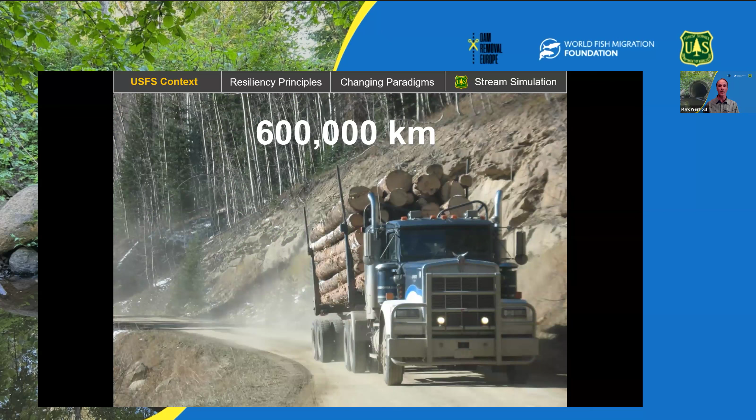Outdoor recreation is enormous on these public lands. Everything from firefighting, the use of fire to manage ecosystems, grazing, timber production. About every land use you can imagine occurs on national forests, and both those uses and our management of it requires roads. So not only are we one of the largest land management agencies on the planet, we're also one of the largest road management agencies. 600,000 kilometers is what our road network looks like. To put that in perspective, that's like 15 times around the planet.

So there are significant benefits that come from that system, but significant impacts as well. The one that we want to focus on is where roads and streams cross. 65,000 of those crossings have been a focus for us, because that's where we narrowed down our initial focus to look at passage for aquatic organisms. But ultimately, we have almost 500,000 crossings that we have issues with, because almost every crossing out there is undersized by current day standards, which means with a changing climate, we have some resiliency issues to think about.

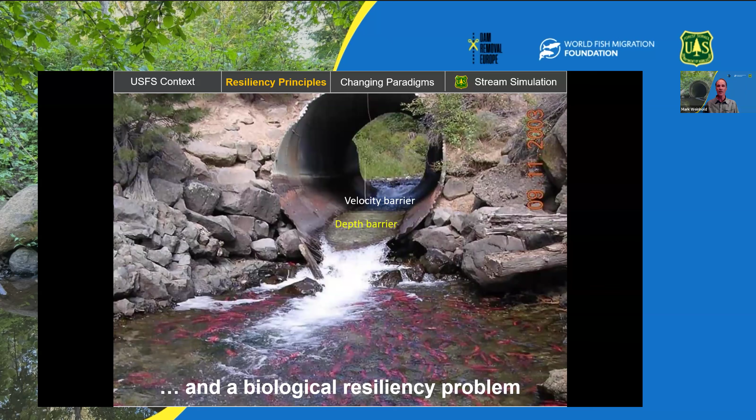And our road system is remote. There are not large amounts of traffic every day to keep track of maintenance needs. They're in far-flung places, and failures happen on a fairly regular basis. I can't guarantee many things, but I don't think I'd want to be that last set of tracks on this road. With that transportation resiliency issue, we have observed over 70 years that we've got a biological resiliency problem too, because this is a very common scenario where you've got a velocity barrier for fish at the outlet of this pipe. Often it's a depth barrier as well, and for many it can be a jump barrier.

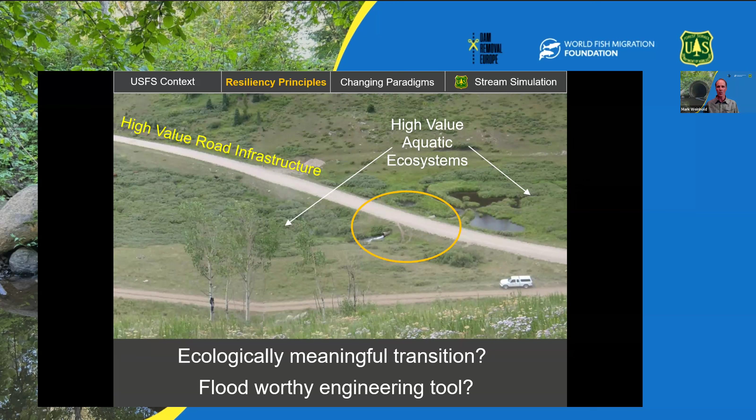So decades ago we found we'd spent a lot of money on this high value road infrastructure. It cuts across very high value aquatic ecosystems, and we have this dismal connection between the two. So we asked a couple questions. The first one, is that a meaningful ecological transition? I think we know the answer to that. It's not. And from the engineering side, is this really a floodworthy engineering tool? Again, the answer is no. So it's caused us to rethink where we're going and how to get there.

And we have changed the way we do business at road stream crossings significantly in the last 20 years. I would like to say that is because as a culture, as an agency, we saw the light and knew that we were doing things poorly, but it actually took lawsuits.

We have in the United States the Endangered Species Act, and we had a number of aquatic species that were challenged, and our road stream crossings were a significant part of that. And so as we evaluated our road system's role in the recovery of these species, we came up with what I would consider to be a few, let's call them embarrassingly simple principles that we need to abide by.

And one is this simple realization that stream corridors are highways too. We don't often think about it that way, but that's simply because as engineers, we never actually invited biologists and ecologists to the table, but they will tell you this straight up.

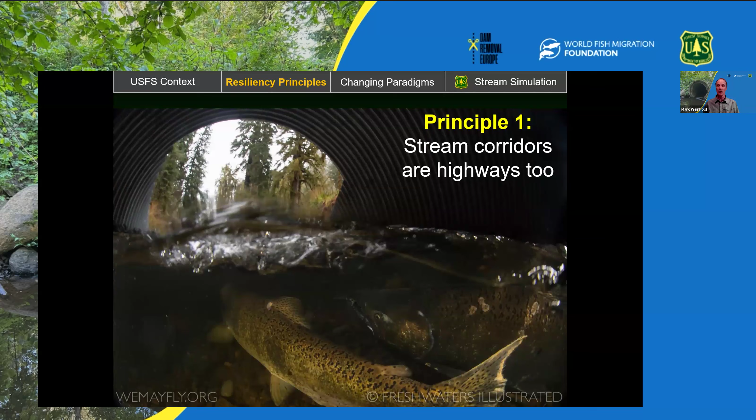And it's true. You can look at an aerial view of the Western United States in the dry season, and you can see the extent of that stream network in green. It's significant. And you can also see through the middle of that image that white road that goes across it. It actually crosses that stream system with one road about 8 times over the course of 2 or 3 kilometers. That has significant impacts to the animals that live there.

And I will say that over time, we've done okay at dealing with these big charismatic fish species, here the Pacific salmon. They are strong swimmers and jumpers. They can move past a lot of things. That was our design challenge at the time.

But when you start to look around just a little bit, you'll find fish like the Iowa darter that we don't know how they move, we don't know why they move, and we don't know when they move. So it's very difficult to do our traditional hydraulic design to accommodate these species. That realization was really significant for us to determine a path forward.

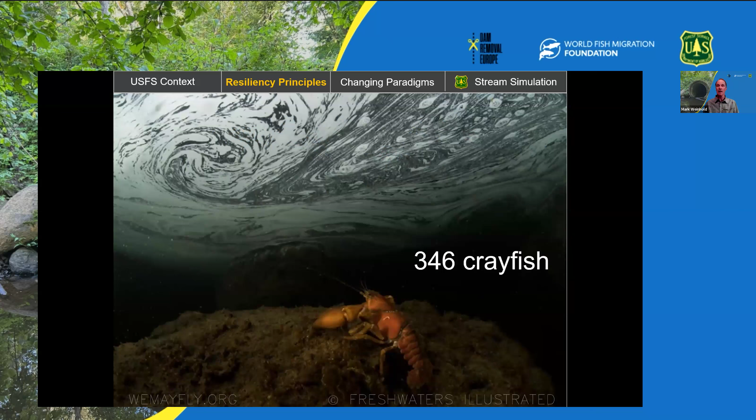When you look even further, you find that we have fish that we don't even think are fish, Pacific lamprey, that move in ways that we don't fathom very well. It's not just about fish. On national forest lands, we manage over 210 different types of amphibians, all of which move up and down these corridors. Who knew that there were 346 different kinds of crayfish, primarily in the southeastern part of the United States? So the assemblage of species that we're trying to accommodate is really big.

So another principle that isn't so much biologically related, but more about our transportation system, is what we found: the best way to predict if your road is going to fail is how close it is to water. And we have done some very silly things over the course of developing our transportation system, where the easiest place to build a road was right along a river. That puts you in harm's way right off the bat.

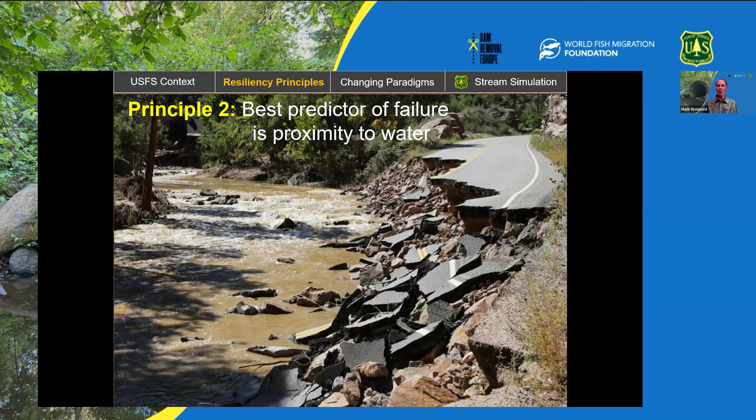And so we have a saying that we like to think about now: what's good for the river is good for the road, which typically means giving it space. And if you take an honest look at your transportation system, what you're going to find is where roads and streams cross, that's really ground zero for where impacts occur, because that's where roads and flowing water interact every day, all day. So during the storms, with any kind of honest evaluation, this is where we find that the impacts are targeted.

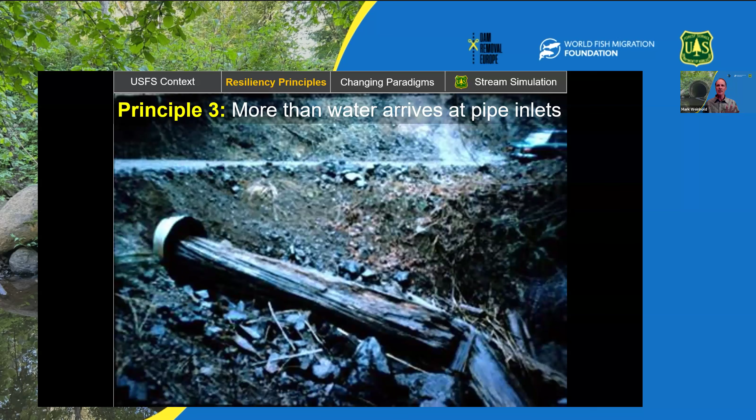And looking at hundreds of these failures, what we found is that pipes don't fail solely because of too much water. They fail because they lose capacity by small pieces of wood and sediment. And they might be pieces of wood the size of your arm that lodge in a corner, and then they fill in with sediment behind that. And before long, you've lost half your capacity and your pipe fails.

Another principle that we've come to is that rivers play the long game. Water always wins in that scenario. And while rivers play the long game, our funding mechanisms don't. We typically are funding a first cost in the short term without thinking about how these will function over the long term and how the life cycle costs look.

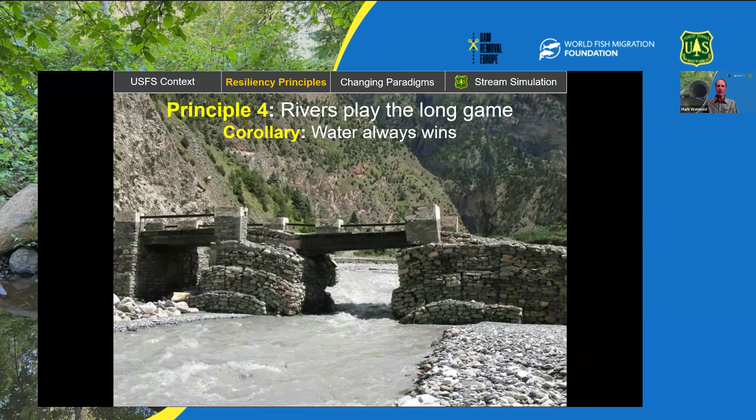But we've been successful in some places. And that's only because in big rivers, we have had enough failures that we learn to stay out of the way. And we do that with big, wide bridges. However, over much of our landscape, most of our road stream crossings, they're smaller. They're not that big. And we had arrived at the conclusion decades ago that we could shove a stream into a small pipe and get away with it for a while. But eventually, that idea backfires with a big flood, and it eventually just wears out.

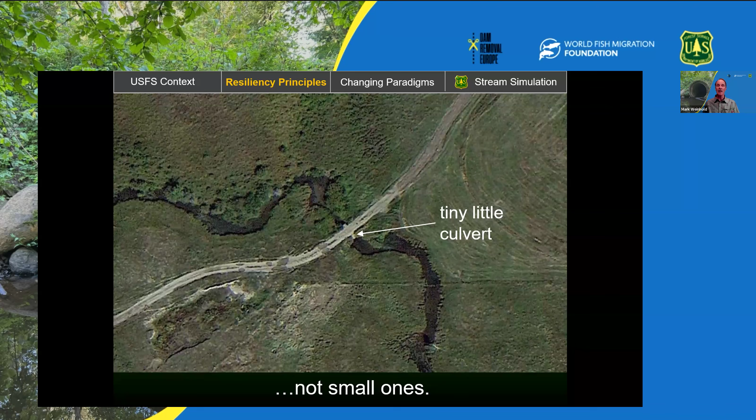When we're putting water and sediment and debris over the top of metal, they ultimately fail by abrasion. And this is over the course of a small number of decades. Compared to a human lifespan, these are really short-lived structures. We found better ways to approach that.

Another principle that's really influenced how we look at these road stream crossings is climate change. And to sum it up, climate change speaks to us through water. That's how we know it's happening. And our relationship with water and our ability to predict the amount that is coming, it's changing. And it's getting very difficult to arrive at. So this idea of leaving yourself some space is important.

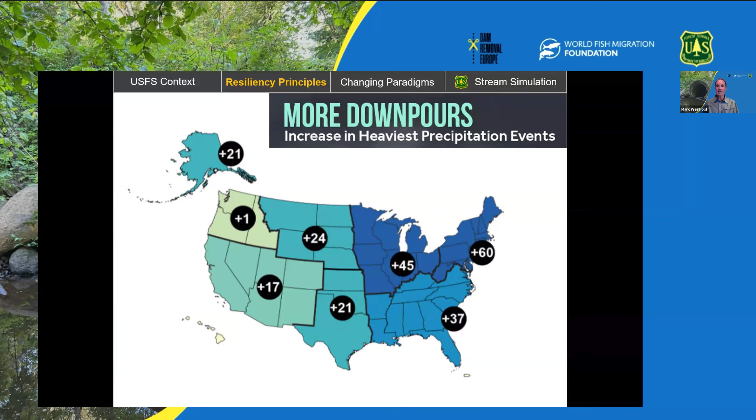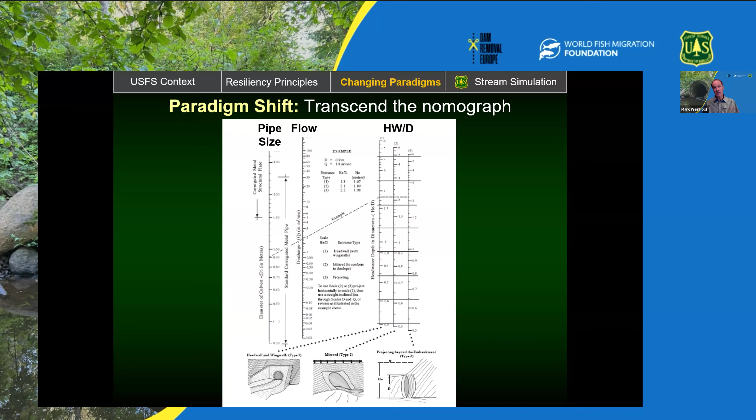And for the engineers in the crowd, you'll recognize this nomograph here. This is something that we're taught fundamentally in engineering school on how to size a pipe. And it's based solely on the amount of water that you predict to be there and how deep you can pond it up at the inlet. This treats every water course like a storm drain. It ignores sediment, it ignores debris, all those other things that affect the capacity of pipe. This is a very dated way of thinking, and yet this is what our universities are still suggesting we do when we get to a road stream crossing.

And the idea, again, is that you pond up water at the inlet and you can push a tremendous amount of water through an opening. So it forces you or encourages you to go to this idea of the most economical crossing, which is going to give you a design that looks like the picture over my shoulder in this image. And what it also does is it gives you a very recognizable shape over time.

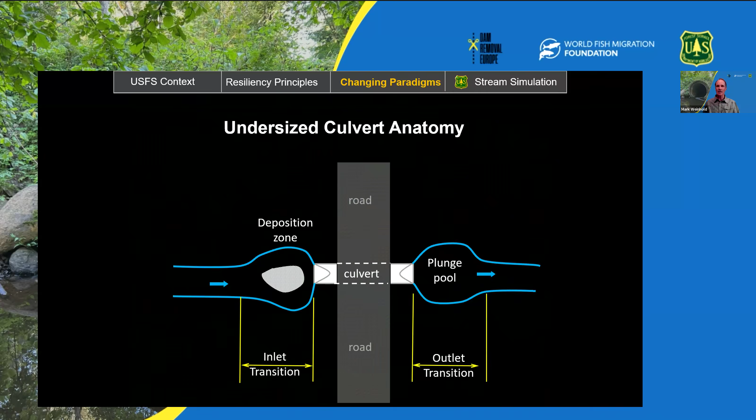The water is flowing from left to right here, and when floods come to these small pipes, they pond up at the inlet. They create essentially a lake where sediment drops out. Often you'll get an island that forms, so you get a wide width at the inlet of that. Conversely, at the outlet, you have high velocities coming out of this pipe, making a big, deep swimming hole. So this hourglass shape is very characteristic of what you will find at these undersized road stream crossings, these inlet and outlet transitions. But the paradigm shift that comes with that, again, that is very recognizable once you know what to look for.

But the idea that streams really have something to tell you. And what you're going to find is the width that the stream is suggesting is a good idea to follow. In our part of the world, with our climate, we've had 10 or 15,000 years from the last ice age. These stream channels have had a long time to determine how wide they need to be. And it's really arrogant of us as engineers to come in and offer them half of that with a pipe width. Bad things will happen, bad things have happened, and will continue to happen.

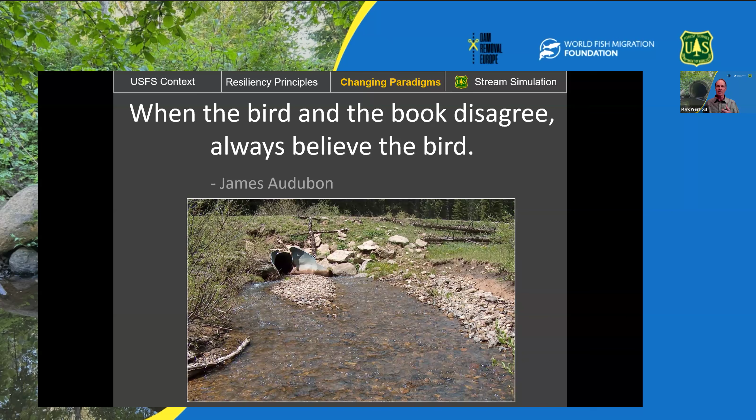And so I'm not saying I'm an avid bird observer, but you might have heard of James Audubon, who started the Audubon Society. But I think he has a real relevant quote here that when you're out looking at birds, when the bird and your book disagree, believe the bird. When it comes to road stream crossings, when your stream channel and what you're thinking about a structure or a pipe size disagree, you better believe the stream, because it will exert itself over time.

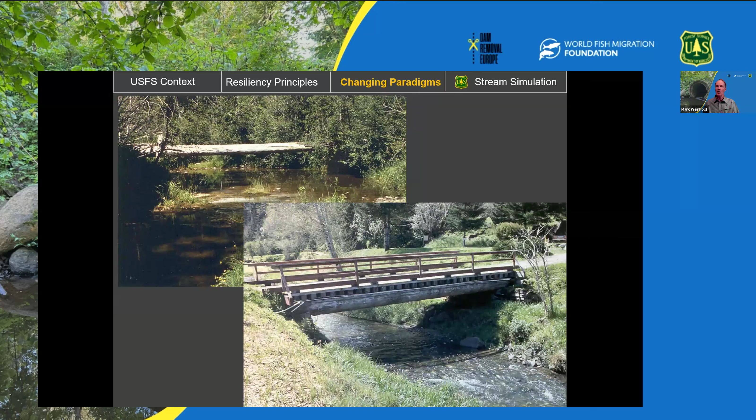And so in my view, we have to go back to our roots a little bit. And this is where the idea of nature-based solutions come in. How do we as engineers observe something in nature and copy it in a way that actually works? We can look at analogs in a natural setting, and we can come up with a design that works really well because it relies on those same natural processes to do that. We can look at a stream channel, the function of that stream channel, how it moves sediment, how it dissipates energy. We can create something like that when we need to.

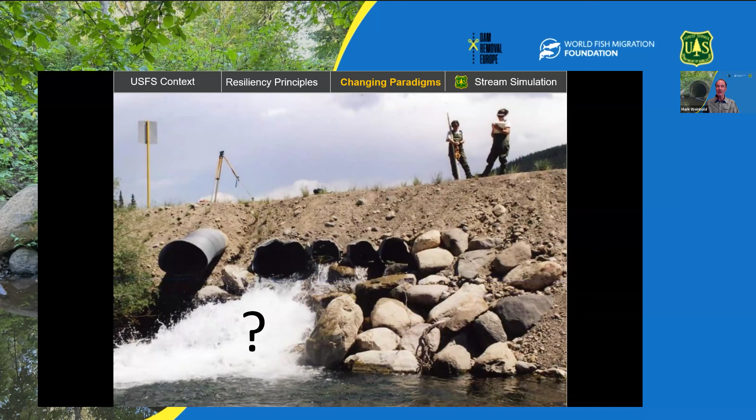We're good at that, but at some point, and I don't know when it happened, we lost our way when it comes to culverts and road stream crossings. And honestly, I think it was really dictated by the availability of metal and concrete pipes at a cheap price, that they make small ones very easily. So we tended to use those. That's backfired a little bit. So where we have come from that is how do we come up with a new methodology that actually lets the stream be a stream? And again, this is where the nature-based solution comes in. We call our method stream simulation because that's exactly what we're doing.

We've decided that these road stream crossings, for all the benefits involved, it's about the stream and not the lid that we put over the top of it. The lid being, is it a metal lid? Is it concrete? Is it a bridge? This is a little disappointing to us as engineers because we got to focus on that for decades. That's really not the point anymore. We're good at lids. We can do that. So the idea with stream simulation is we're basically copying what is out there.

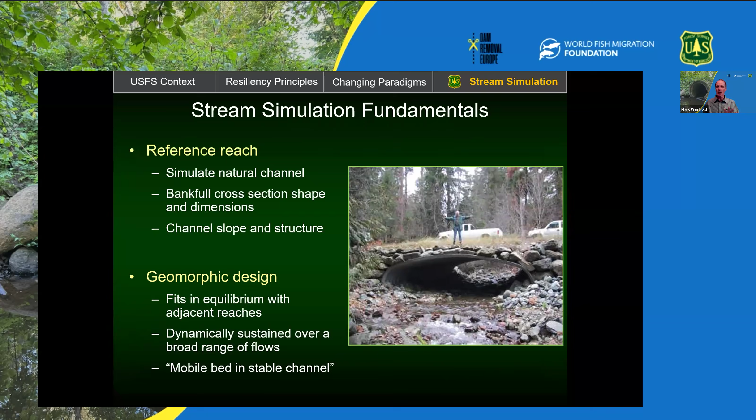So this idea of a reference reach is really important because we're looking at the adjacent channel upstream and down, looking for a place where we can get a template to simulate that channel in the shape, in the slope, and in the bed material. The idea is this is a geomorphic design, that it is in equilibrium with the rest of that channel. It's not fixed in place. That bed goes up and down. It's dynamically sustained over a range of flows, and think about it as a mobile bed in a stable channel. This is the idea of stream simulation, and we will spend a week in a training course teaching people how to do this. A fundamental piece of information that we use on that is this longitudinal profile.

Once we know that, we're not the sharpest people in the world, but we can copy stuff. We can copy the cross-sectional shape. We can look at the variability of widths. What is the stream bed material? What are the sizes? What is the channel form? That's what we will reconstruct through the road.

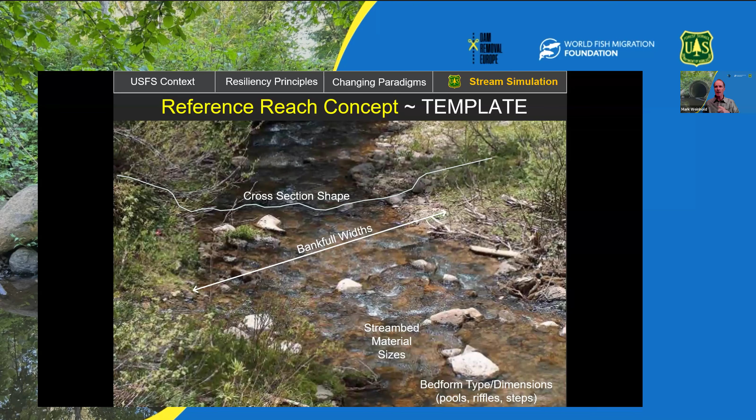And if we had a magic Harry Potter wand, we would pick up that piece of channel and set it right in the road. We can't do that, but we can do math instead to get to that very same place. The idea is, for that same stream bed, we can have any lid we want, any lid that fits. And here's where your economics, your durability, your traffic, and all those things come into play.

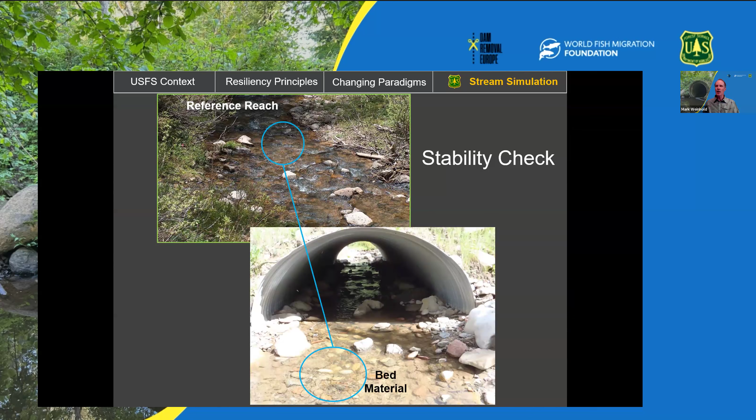That doesn't get us out of a lot of the traditional engineering pieces that we do, because we're still going to come back and look at the bed material and make sure that when bed load or stream bed material is moving in a flood outside this channel, it's moving on the inside as well. If we have key pieces like rock along the banks or key roughness elements, we're going to size those to be stable in a big flood.

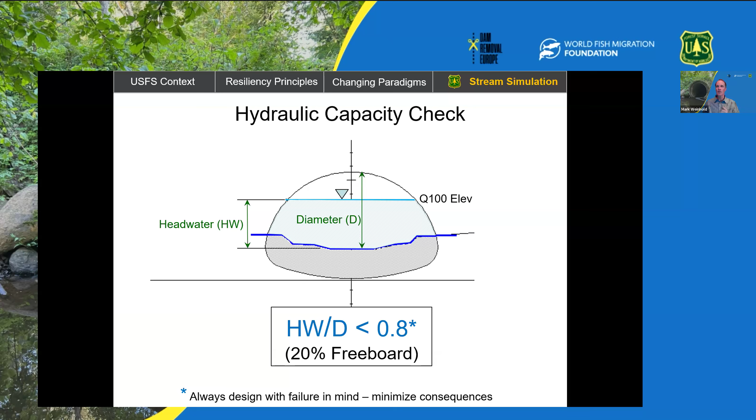We'll always come back and check the hydraulic capacity of this structure. We have a criteria within the Forest Service that during our design flood, we don't want that structure to be more than 80% full. One, we don't want to pressurize it with water over the top, because that creates really high velocities through there. But we also want to leave room for uncertainty, for debris, that sort of thing, to make sure that we're fine during those big floods.

But to wrap that up, the general idea here is that this is a common scenario of before. Not a real ambitious solution here, because it's got insufficient hydraulic capacity. We know that. These are 40 years old. They plug all the time by debris, especially when you have multiple culverts that have really inefficient inlets. The culverts wear out from abrasion going over the top of it, and they're migration barriers.

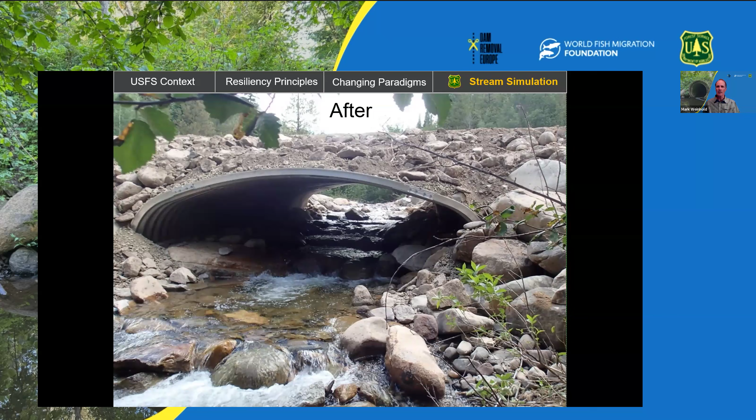So our solution would be to actually span that channel, rebuild that stream channel to look like the rest of the stream, and in this case, put a lid over it that's an aluminum box. And that maintains the width continuity. That maintains the profile continuity, so your hydraulics and your flood capacity is accomplished, as well as the aquatic organism passage, because this looks exactly like the rest of the stream.

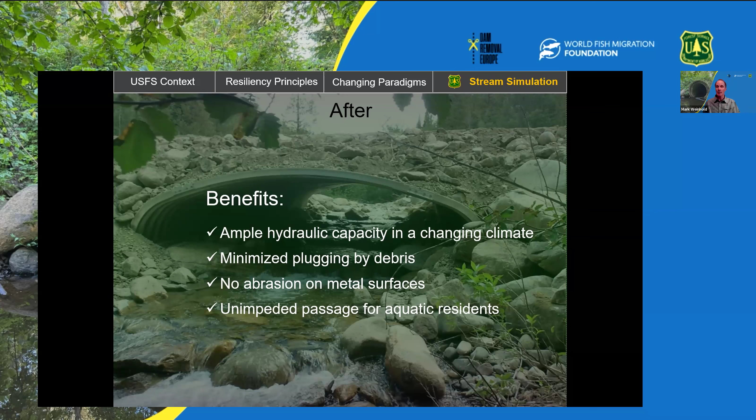So when you come out the other end of this, you have your capacity, you've minimized your debris and plugging in these big floods, you've taken away abrasion on metal surfaces, so these will last as long as that aluminum lasts, sitting up there out of harm's way, which can easily be 75 to 100 years, and you have unimpeded passage of fish and other aquatic organisms.

So to wrap this up, this is way too common of occurrence for us, and we've moved past this competition between ecology and economics, which led us to this point. And now we've been able to reframe this in a longer view with life cycle costs, where we can really start talking about the benefits of this solution, and not just the first cost of it. And that's going to transition to what Erica Borum is going to talk about next, about essentially the dividend that comes from designing for resilience. So thank you.

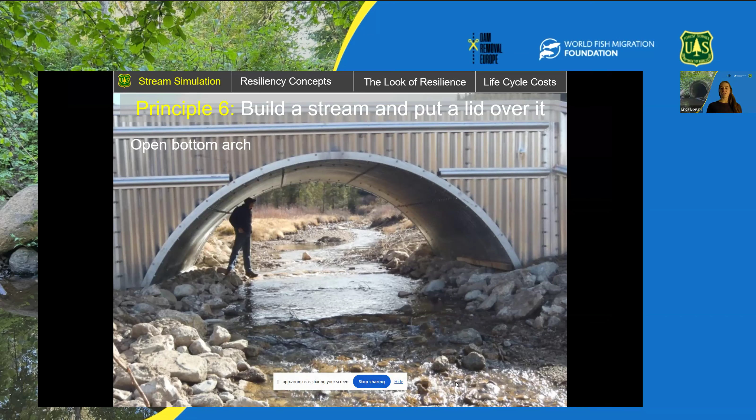What you're looking at here is an open bottom arch. It's sitting on buried concrete footings. You'll notice the continuity of the stream into, through, and exiting the structure. This continuity is very important.

We have another option that is a pipe arch, an enclosed structure that is embedded into the stream, with the stream bed and banks placed on that structure. Another option is a round pipe - another embedded structure, and this is another shape that can fit around the stream.

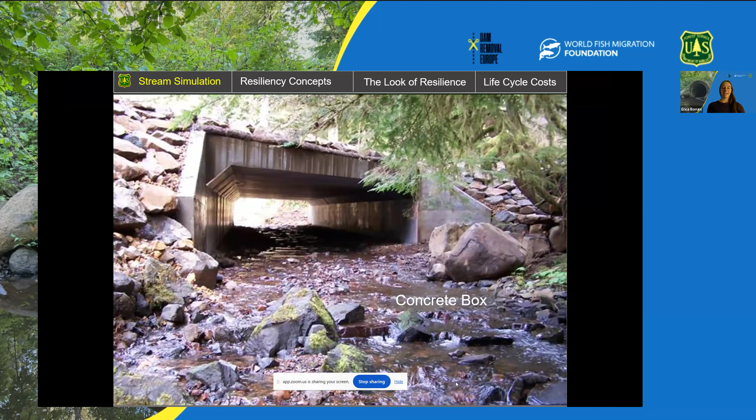Concrete box - we use concrete all the time. Concrete is another lid that can be used. And of course, we always have the option to span our channel with a bridge. In all of these cases, we're focused on matching the channel characteristics. So that's our goal of stream simulation - we are matching what the channel is telling us how it needs to be.

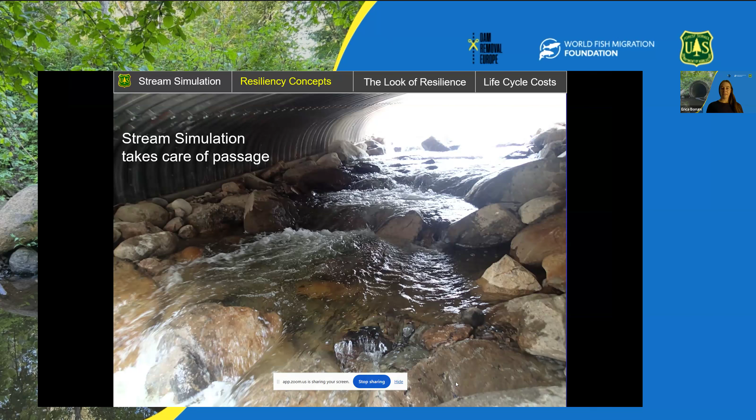Moving into resiliency concepts - the resiliency of a stream occurs by allowing a stream to behave as a stream without the road acting as a dam. As Mark talked about, we have sediment, debris, and animals. This allows free movement into and through our crossing.

Mark had mentioned what's good for the river is good for the road. This is where we've spent the last 30 years learning this - we've made a lot of failures and learned a lot of lessons. So the Forest Service stream simulation design has found that it also is flood resilient. By matching the width, the gradient, or in other words, listening to what this stream is telling us, we have found that they're also flood resilient.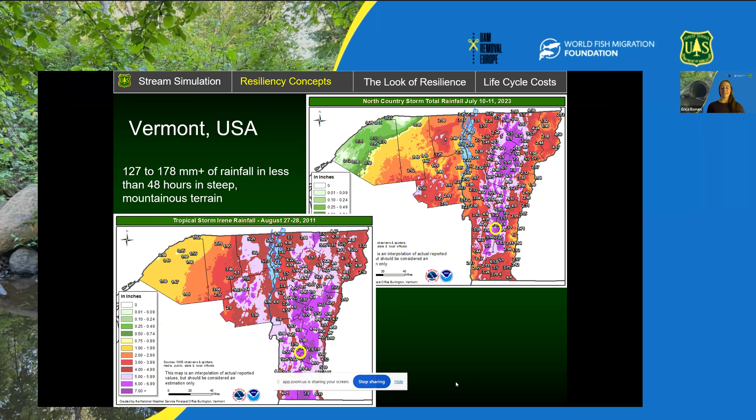This second storm had near the same intensity. I want to focus on and highlight the yellow circle at the lower part of this image - this is the area of the Green Mountain National Forest in Vermont that we'll look at. This event, Tropical Storm Irene, was categorized as a 500-year recurrence interval, or what we commonly call a 500-year storm.

In this 2011 event, many forest roads failed and were severely damaged, except where we had 3 different stream simulation structures. In this example, notice the stream bed when you compare this image on the left, which was pre-storm. You'll notice that the bed adjusted as we would expect in a large storm. However, the road remained intact and passable to aquatic organisms.

This is the same structure on the upstream, inlet side, after the 2023 event that happened last July. Again, no damage to the road. So we're seeing the resilience of these structures in floods.

Another case study occurred in 2016 in northern Wisconsin on the Chequamegon-Nicolet National Forest. This flood event was estimated, at this particular site, at 1.6 times the 500-year recurrence interval. These floods are becoming very hard to quantify.

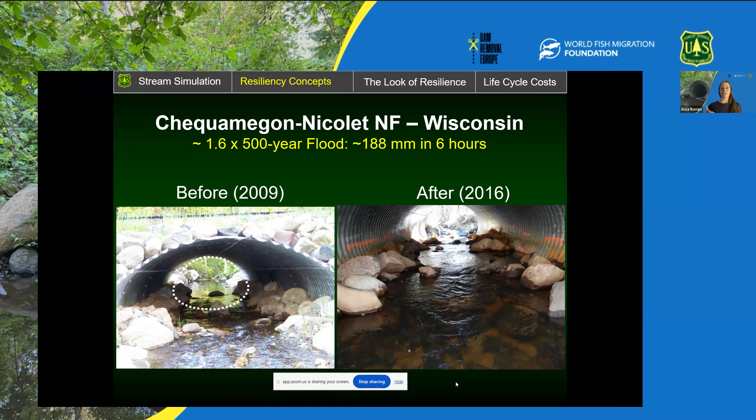Getting to principle 8: design with failure in mind. We are seeing these climate change events that have left us guessing when the next flood will occur and just how big it will be. So I will step through some ideas to get at this question of how we design with failure in mind.

Here's a depiction of the confluence of 2 tributaries. This cartoon shows what happens when a road is installed crossing one of these tributaries and a culvert is blocked, diverting that stream down the road until it eventually finds its way back. Water takes the path of least resistance, finding its way back into the channel, but taking the earth with it in the form of landslides.

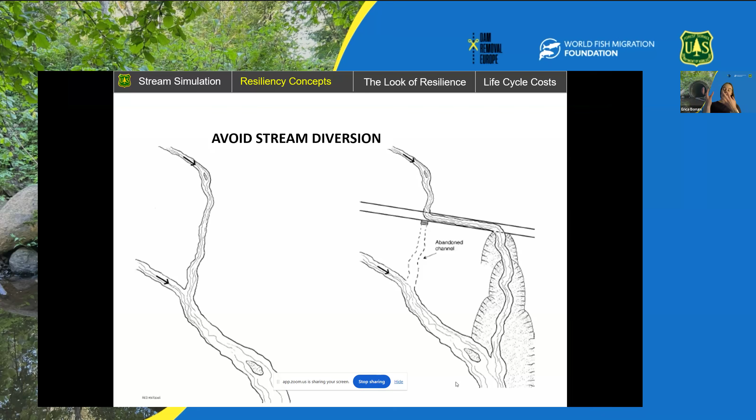We've had single culverts on forest system lands that have caused millions of dollars in damage, where the stream is diverted, creates a landslide, diverts again, creates more landslides, and the mountainside essentially just drips off the landscape in these large events. This is a cartoon of what that looks like when the stream diverts down a road, and now here's the actual photo of what that may look like - we've got over 1 meter of road that's gullied, and you can see a ditch relief culvert has become exposed.

We want to avoid this stream diversion at our roads, and we also want to think about designing with failure in mind. So as we begin to learn to think like water, we can start thinking about what that designing with failure in mind looks like.

Here we have a road at a crossing in a stream valley bottom that's relatively confined. If this culvert were to plug, the water would fairly easily divert over the road and find its way back into the stream channel - not ideal. We can remedy that with stream simulation and that 20% freeboard, allowing that capacity.

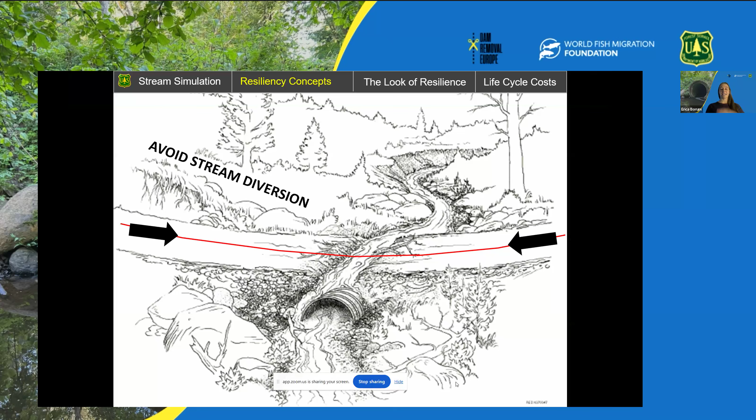What we really want to avoid is a continuous grade where the culvert plugs. Where will the water go if we're not designing with failure in mind? One easy solution is to put a dip in the road that allows water to continue over the road. We can armor and reinforce that to avoid losing the fill, and the water simply returns to the stream channel. This is one way to design with failure in mind and avoid diversion potential.

Here's a cross section of a very wide valley bottom, this very wide floodplain. What we would do here is use stream simulation to encapsulate the main channel, and perhaps add a road dip. So we have this wide floodplain - where will the water overtop, and where do we want it to overtop? In a very large floodplain or valley bottom, we'd install a road dip. If necessary, we can also install a flood relief culvert off in the floodplain margin for additional water conveyance across the floodplain.

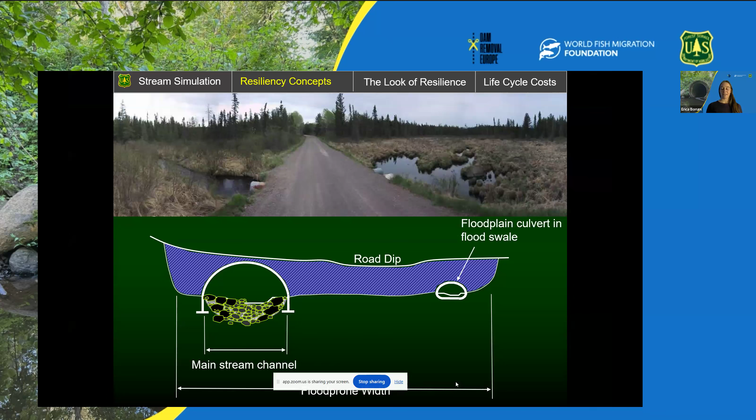Now that we understand stream simulation design concepts, the next question is: what about the costs? Mark touched on this briefly. Can we afford these structures? This brings us to principle number 9, the business case for resilience.

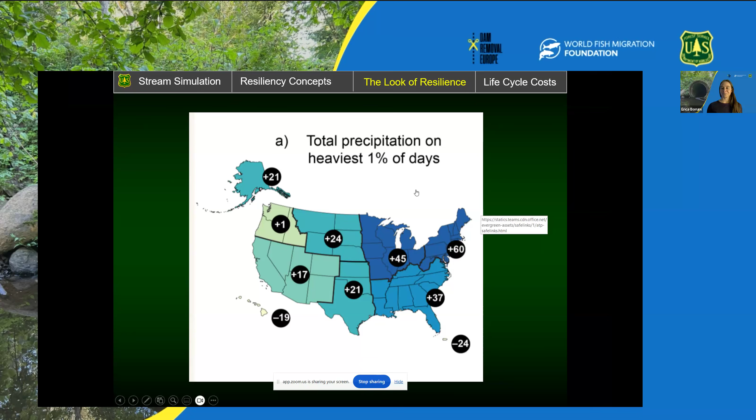Mark showed this map earlier, the increase in heaviest precipitation with climate change. Notice this 45 to 60% increase, this dark blue section. That 45-60% increase pretty much aligns with our Forest Service Region 9 area. These darker polygons on the map are National Forest System lands and grasslands - this is the Region 9 Forest Service.

We had a coworker tracking all the floods that occurred between 2011 and 2018 - flood events where, due to climate change, we're seeing this increase. What was calculated and found was that our road system does not have the resilience that we need. There was $63 million worth of replacement and repairs on forest system lands.

So I want to highlight two case study examples: Wisconsin, this is the Chequamegon-Nicolet in the far north of Wisconsin, and the Green Mountain National Forest down in Vermont.

Heading back to the Chequamegon-Nicolet case study in northern Wisconsin - this entire flood event, I talked about one particular site being 1.6 times the 500-year recurrence interval. Well, across the whole Chequamegon-Nicolet area, depending on the isolated events, the flooding was estimated at 1.1 to 10.5 times the 500-year recurrence interval. These are just enormous events.

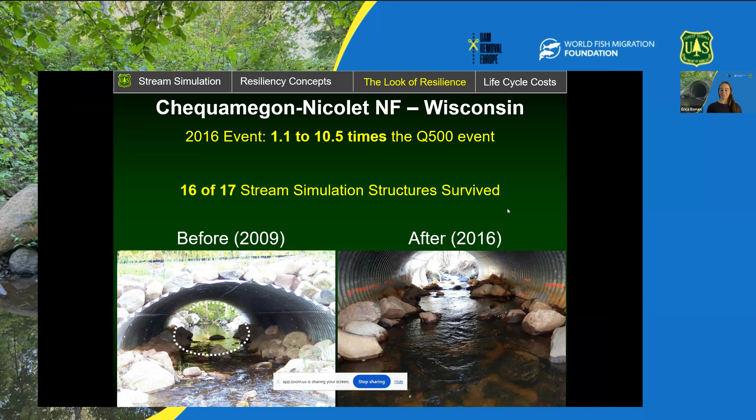We always get back to: what does this cost? Our best basis of analysis is to look at replacing in kind. So we have this 1.4 meter undersized structure - this was already replaced with stream simulation by the time the event occurred. But had the forest replaced this 1.44 meter, or less than 5 foot, pipe arch with something similar, we found it would have been about $27,500, adjusted for 2020 US dollar pricing. What was actually replaced was a 3.66 meter pipe arch countersunk, or a 12-foot wide pipe arch. That adjusted for 2020 costs was around $69,000.

So it just so happens that increasing the width 2.5 times also increased the price 2.5 times. But as Mark mentioned, this is not the whole story.

Similarly, I went through this exercise on an example in Colorado, looking at a structure being replaced that was grossly undersized. It was a 2.3 meter by 2 meter pipe arch, and we replaced that with a bottomless structure that was 5.9 meters. So this cost is nearly double.

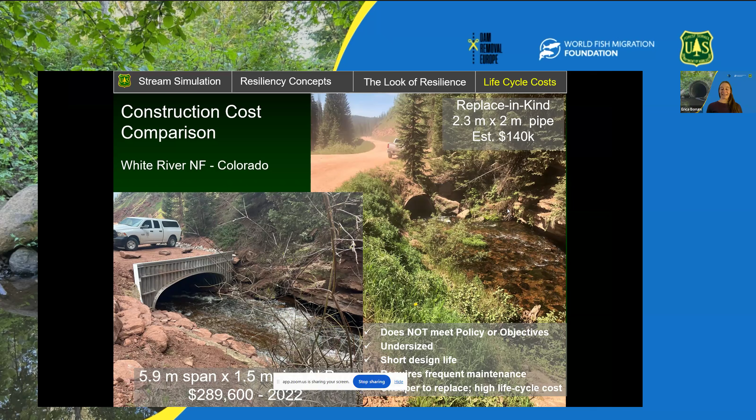What we've found is, yes, the first cost may be higher, but it's not the whole story. We need to look at life cycle costs. So that brings us to our last topic of life cycle costs.

But first, I want to touch on some research that has occurred on the Green Mountain National Forest during Tropical Storm Irene. They found that by increasing the size of those 3 undersized culverts to stream simulation, that was an increased installation cost of 9 to 22%. So I would argue that's a minimal cost expense to ensure resilience.

Bob Gubernick, one of our counterparts at the Forest Service, did some statistical analysis and found that by increasing a structure by 50%, you increase the cost of installation 20 to 33%. So these economic analyses of stream simulation, we compare them at year zero. But I've yet to see a true life cycle cost analysis of stream simulation where all of these different inputs are considered.

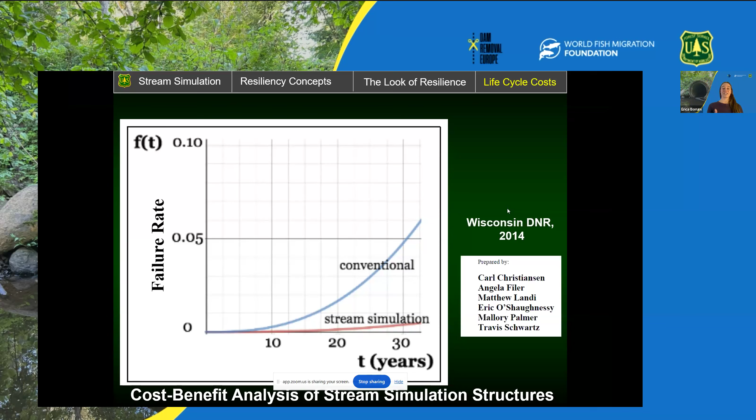So another report, Wisconsin Department of Natural Resources, I just want to point out this graph. They did their own independent study of stream simulation. And what they found is that conventional culverts over time are prone to failure, as we see again and again. Whereas stream simulation structures, that red line down at the bottom, pretty much remain constant while these hydraulic culverts have this exponential increase in proneness to failure. So I think you know where I'm going with this.

So I want to talk about this life cycle cost analysis and the inputs that actually go into these traditional, undersized culverts. So first costs, principle 10, do not tell the whole story. These year zero costs, comparing traditional culvert construction costs to stream simulation, it's comparing apples to oranges. So we have these numerous inputs for life cycle cost analysis. If you were to add up all of these inputs, you'll see how these flood events become very, very costly.

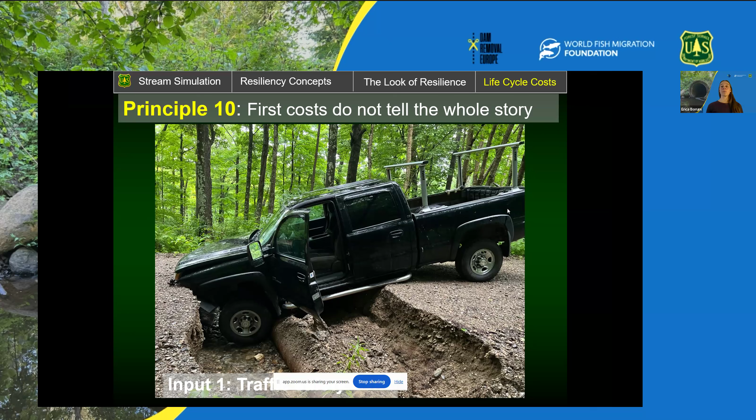And the first input being traffic safety. As Mark talked about, safety in the Forest Service is first and foremost, but we have so many miles of roads that we don't necessarily get to every mile prior to the public. So these are situations that we want to avoid, and we want to make our infrastructure more flood resilient.

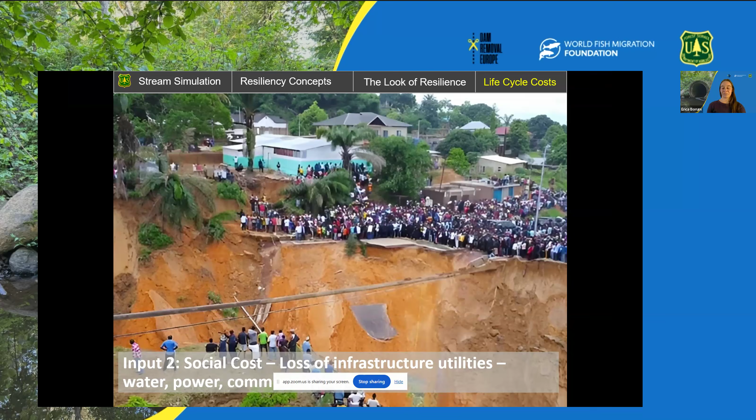Another social cost: road closures, delays, loss of access, emergency access, fire access, recreation access. So these social costs are really starting to add up. Input 3, recurring maintenance costs. This includes clearing out the pipes, clearing debris in and around a crossing, repairing erosion, resurfacing a road. So these recurring maintenance costs that occur even in smaller floods for traditional culverts start inching the cost up.

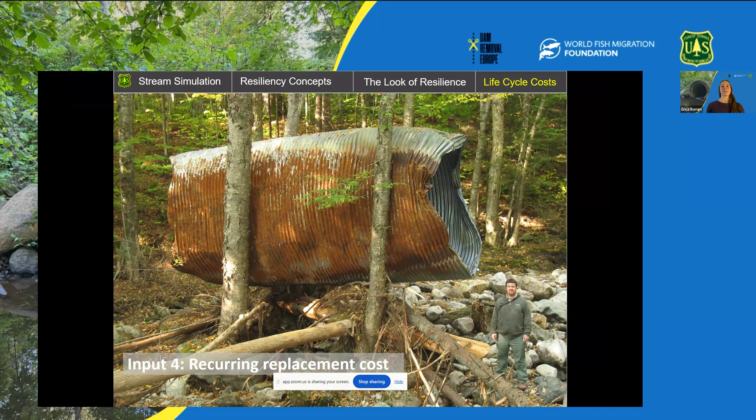Input 4, recurring replacement costs. In flood-prone areas, such as the northeast, traditional culverts require more frequent replacement. And I want to draw attention to this gentleman standing here in the right corner of this photo. That's a big structure, meaning this event in Vermont was a big event. So it's just a testament to stream simulation and the resilience of it.

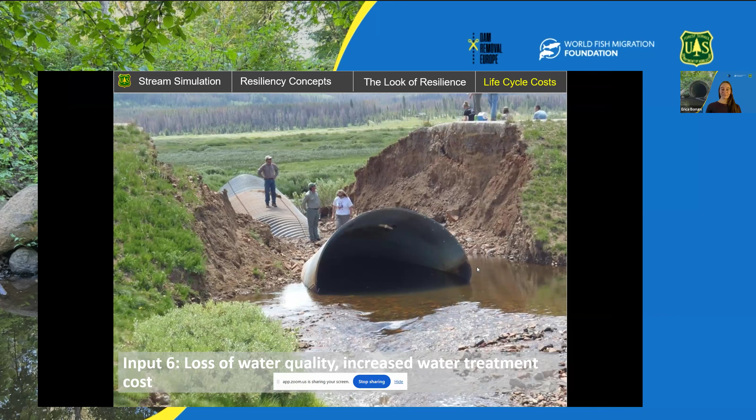So, although in the literature on the economic benefits of stream simulation, not one of them has covered input 7, which is natural capital. And if you're not familiar with natural capital, that is simply the world's stock of natural assets such as geology, soil, water, air, and all living things.

So natural capital is a very important input. And being that we're talking about aquatic passage, we are sponsored by World Fish Migration Foundation. I wanted to point out that of that $66 billion of natural capital input into Colorado last year, about $2.5 billion was directly attributed to fishing and angler activities. So this is a big deal across the country, across the world.

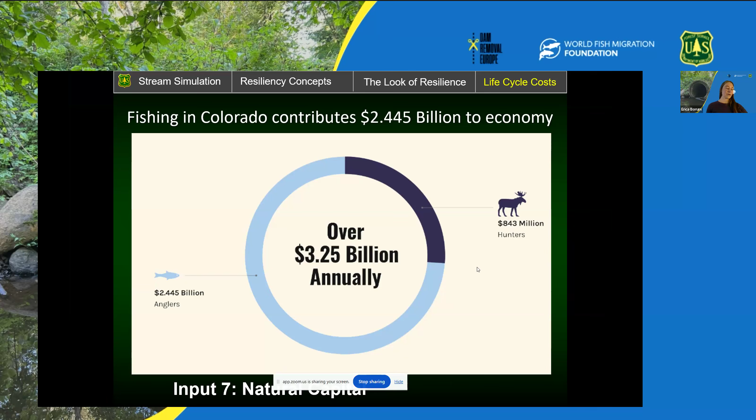So I would like to summarize the dividends of stream simulation. So a return on investment, it not only includes ecological and geomorphic connectivity, flood resilience, low to no maintenance costs, long lifespan. In the end, they do have cheaper life cycle costs. So now that we know better, we are trying to correct our mistakes of the past.

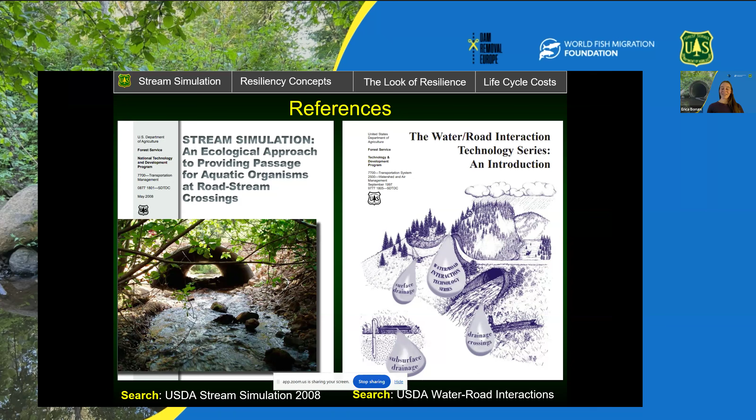And I just wanted to point out, the Forest Service has been at this for a while. We have these two references, the stream simulation guide that goes through the approach of providing aquatic organism passage. And then what we talked on a lot with flood resilience and flooding with climate change, this water road interaction technology series is very helpful for anyone who may be interested in more information. And with that, I will take any questions.

Thank you, Erica. We have a lot of questions in the Q&A. Celine is asking, why are metal structures used instead of concrete in the US? We see very little metal structures where I am. Is there a reason why? I believe the reason we use a lot of metal is because it is commercially available and they come in so many different sizes. In some countries, concrete is the predominant material source, and so that is what is used. It comes down to commercial availability. There's a demand in the US, so then there's a market to provide that.

Thank you. A question from Richard. Could you elaborate a little more on how you take the overland case into consideration when designing a culvert? Do you design the roads on top of the culvert to have a section which could handle extra overland flow without causing damage to the structure? Correct, yes. So one way to do that is to provide that dip in the road that can be armored. We want to try to create the elevation of that dip to be lower than the inlet of our culvert. So as Mark mentioned, we never want to pressurize our flow. That increases velocity, increases scour.

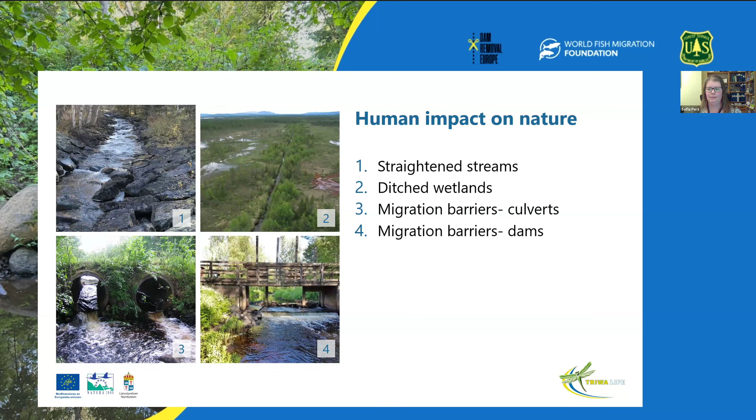So you might think that the northern part of Sweden and Finland is untouched and wild, but that is simply not true. Forests, water, and wetlands are very much affected by human activities. We have straightened streams, ditched wetlands, and built migration barriers such as culverts and dams. And I will talk a little bit about some of the other actions besides migration barriers, but I will be short. We work a little bit with the damage done by timber floating. And we will restore about 96 kilometers of streams in the project.

Forestry has been and is an important industry in the northern part of Sweden and Finland. The timber is cut down in the inlands and transported to the coast where the industries are. And before there were roads, they used streams to transport the timber. And they used streams as small as 2 meters in width for timber floating.

But in the beginning, the streams didn't look the way they do now. There were a lot of boulders and side channels, and the timber got stuck. And that was a financial loss, as well as a dangerous working environment. So they started to modify the streams to facilitate the timber floating. They straightened the streams, they cut off side channels, they removed boulders and stones.

And this is, of course, a habitat loss for the plants and animals living in the stream, but also the water velocity increased. And they usually built barriers between the terrestrial area and the water area in the shoreline. So there's no exchange between them, and that is a very important area for animals and plants.

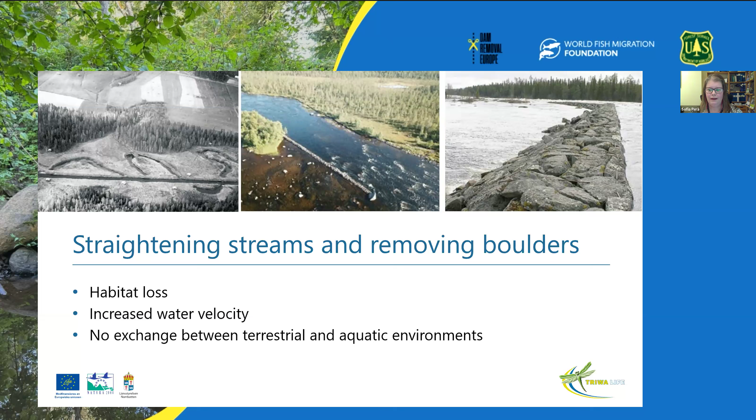So what we do now is that we are restoring rivers by putting back big boulders and stones. And we do large structures. We use excavators. And we also do deep pools for larger fish. We open up side channels, and we do a very important thing, and that is creating spawning beds.

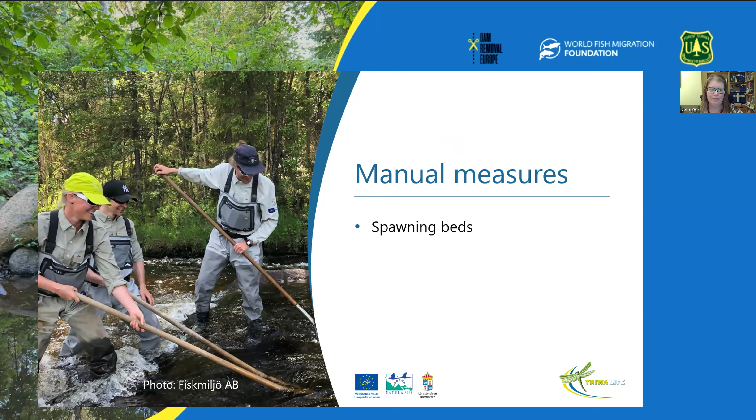But we also do some manual measures. We do spawning beds with special tools, we have a method called the Hattijoki method. It is developed here in the northern part of Sweden. And so far, we have only had one field season.

But our second part of the project is to restore wetlands, and we will restore about 2,500 hectares of wetlands in the Torne River Valley. To gain more agriculture and forest land, wetlands were ditched. The ditching started slowly in the 19th century, and in the 20th century, the machines made the work easier and a lot faster. More than half of all the wetlands in Finland and Sweden are ditched, and an estimation shows that on 25% of the ditched wetlands, the forest is not growing, so the purpose of the ditches was not achieved.

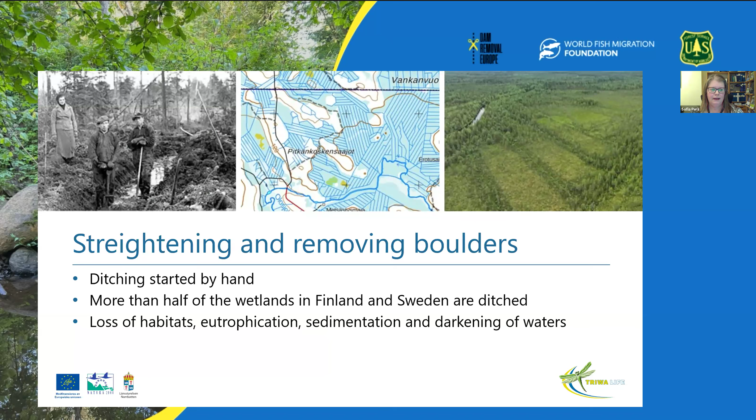So what we do now is we fill the ditches with peat, and we use excavators mainly, but sometimes we do it manually, and we do it with timber and peat. Wetlands' capability to store water is better after restoration. Even in hot summers, the streams close to the wetland do not dry out.

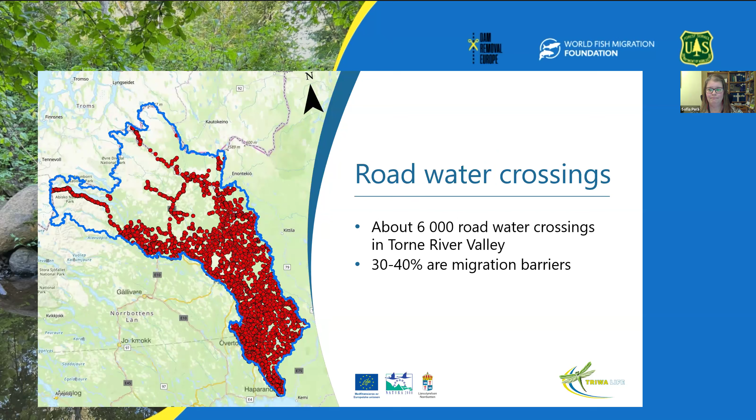And now to the main story of my presentation, the migration barriers. Our goal in TRIWA is to remove 399 migration barriers. And if we look at the map, there's about 6,000 road water crossings in the Torne River Valley, and about a third of them are migration barriers. But we also have a lot of dams, about 200. They're not hydropower dams. They're dams built for timber floating, private fish ponds, fish farming, or just to regulate water levels.

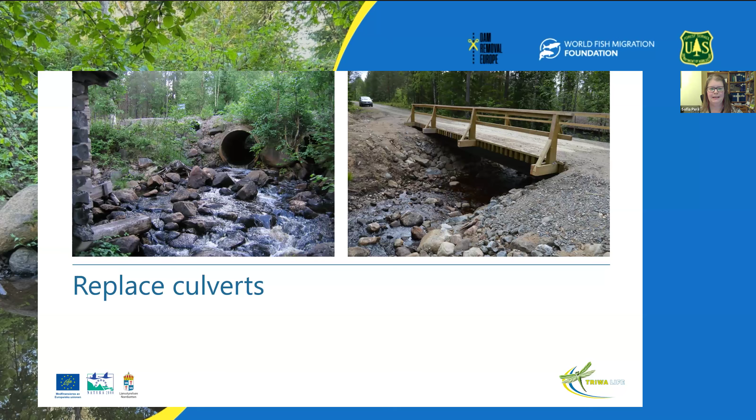And when we work, we always try to do all the migration barriers in the same stream, because if we remove one upstream and there's still a barrier downstream, the fish that migrate from the sea will not come to the spawning areas. So for larger streams, we're usually replacing culverts with bridges. This is a good solution, but it is expensive. But we also replace culverts with arches that keep a natural riverbed.

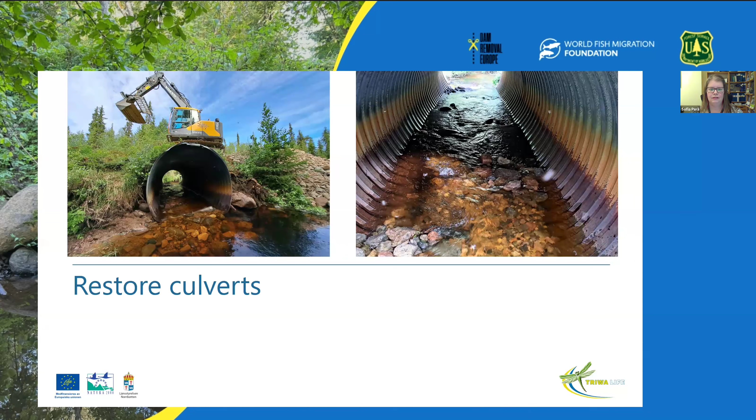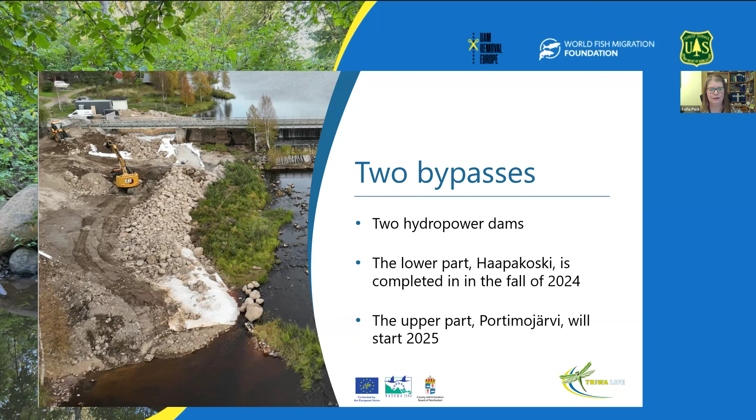But we also have two really big measures, and one of them is done this summer. We have 2 hydropower dams in a tributary in a stream called Tengeliönjoki on the Finnish side. And we have built one bypass past one hydropower dam, and we will build the next one next year. And the bypasses open up more than 970 kilometers of river continuum upwards from the hydropower dams. So I have a small film that shows how it looks, and you can see the hydropower dam on the right and the bypass on the left in the film.

So far we have removed 102 migration barriers. And I also want to add that besides the measures we're doing within the project, the Swedish Transport Administration will do some measures inside the project area for the public roads. They have a budget of 18 million euros, and have removed 24 culverts so far, with 11 more to go. These are much more expensive since it's on public roads.

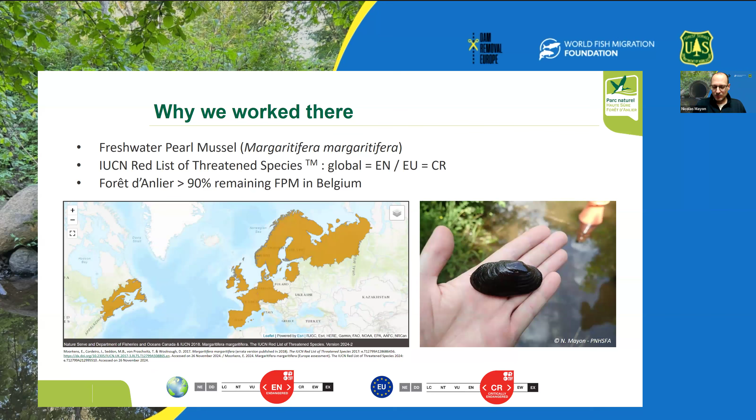So we have a big environmental issue here with this freshwater pearl mussel, because in the Anlier forest, the last pearl mussels of Belgium are living there, actually. So this is really a big issue for us. And the link between culverts, which is the topic of the webinar, and the pearl mussel is brown trout, because freshwater pearl mussels have a very special reproductive cycle during which the larvae, which we call glochidia, have to fix onto the gills of a host fish, which in our case is brown trout.

So to make good pearl mussel conservation, you have to maximize the probability of encounter between the freshwater pearl mussel larvae and the host fish. So you need really optimal brown trout populations. And that was not the case in the streams in the forest, because fish surveys told us that we were not at optimal levels. And we linked that to fragmentation issues.

We carried out a fish passability assessment using the ICE protocol. Some of you might know it's a French and Belgian methodology to assess fish passage. And it shows that we have high fragmentation issues, mainly on tributaries that are disconnected from the mainstream. And those tributaries are high quality spawning grounds for brown trout. So that was really an issue for us.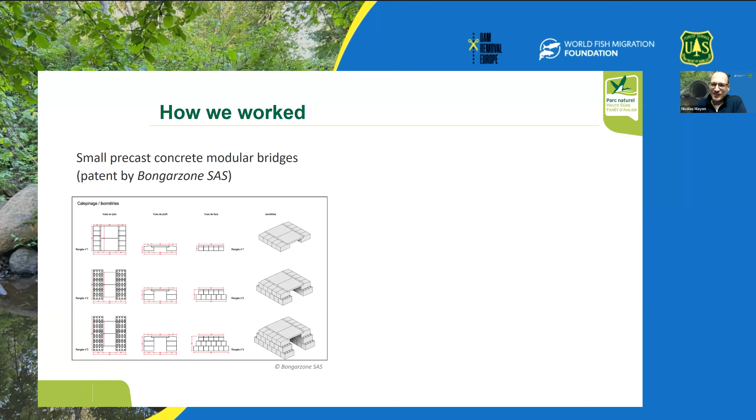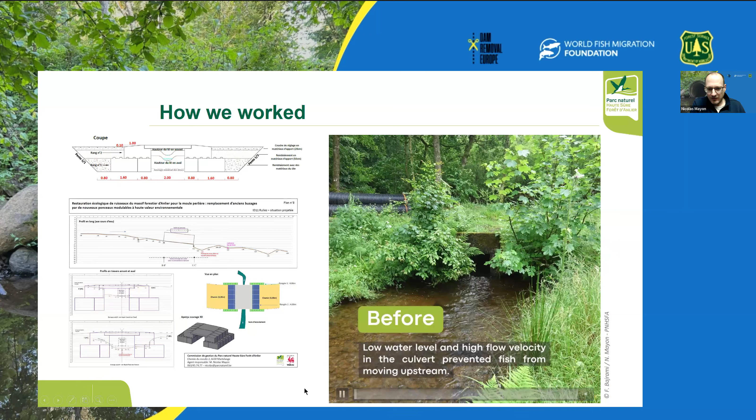I have prepared a short video. I hope it's gonna work, or if it doesn't work, I can shift to another slide with just pictures. So this is one of the culverts we worked on, and it was a major barrier. So prior to the work, we chose to divert the stream and pump the culvert area dry to avoid mud flush into the pearl mussel population, so it's really protected to avoid sediment.

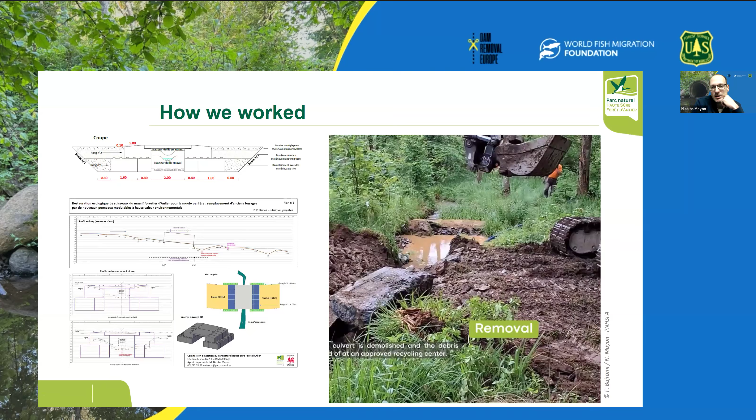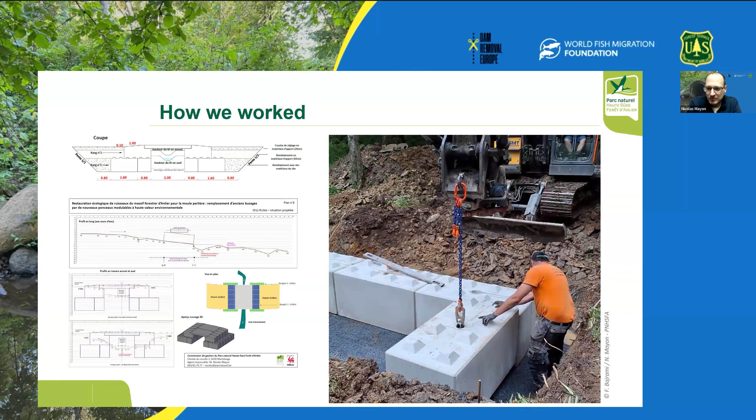Then we proceed to the removal of the old culvert, some excavation work to install the new bridge, a leveling bed of gravel to lay the abutments, and then we start building the bridge brick by brick. The first brick takes a little more time, but once the first brick is set, everything goes really fast. It's really easy. And it's dry assembly. There's no concrete, no mortar, so it limits the risk of environmental pollution.

And in between the two abutments, we bring riverbed material to make a new riverbed. Then we come with the deck, remove the cofferdam, and open up the river again. And so it's done. So you see, it's really easy and really fast. And it has a lot of advantages.

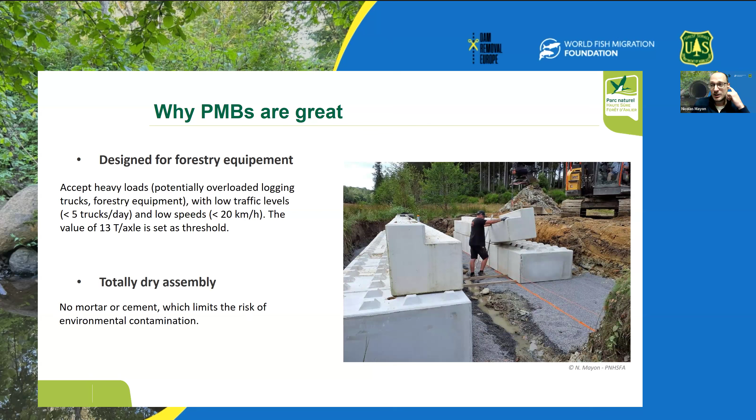The first advantage is that technique is designed for forestry equipment. So it accepts heavy loads, loaded logging trucks and forestry equipment. It's not designed for regular roads, but for forest tracks. So low traffic level and low speed, it's okay. Another advantage is that, as I told you, it's totally dry assembly, no mortar, no cement. So when you have to work in areas with high environmental issues, it's really safe.

When you have to dig deeper to find a hard base, you can just adapt by bringing more bricks. And one thing that is also great is that these are all small individual elements. So that's really easy to handle in a constrained environment like a forest where you've got trees everywhere, and it's also a protected forest, so you don't have to cut all the trees. It's really easy to handle those small bricks in really constrained places.

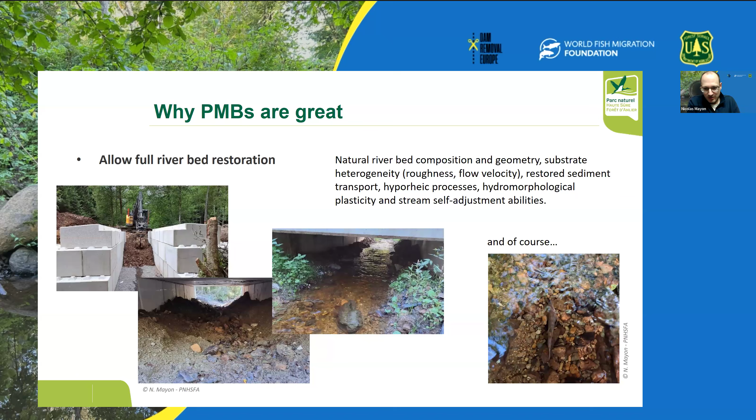We made 11 culvert replacements in the forest this summer, and this allowed us to reopen 28 kilometers of streams and brooks that are really high quality spawning grounds for brown trout. So we expect now in the coming years to see some recovery of the brown trout populations, and eventually freshwater pearl mussels.

I've got a last slide about budget information, because these are questions I'm often asked, and it's really difficult to answer that question because the cost per site is highly variable—and it's not because of the associated work like earthwork, backfilling, or culvert removal. What really changes is the precast modular bridge itself, and it depends on the geometry of the bridge.

It's the same as those Lego games. If you ask me what's the cost of a Lego game, I would say it depends—you got small Lego race cars and you got huge Lego spaceships, and the price is not the same. It's the same here for the bridges: we make really small bridges and we make bigger bridges, and the price depends on geometry, so it's really hard to tell about the cost. But you can see about the range of the cost for the budget.

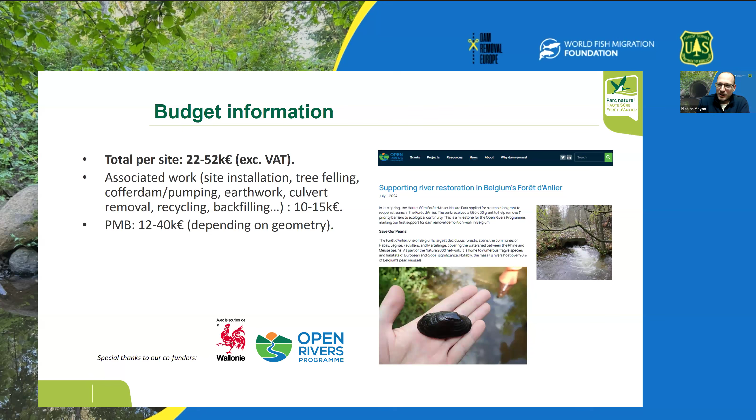What is the maximum bridge span? Have these modular bridges faced any high flow? The maximum span of those bridges we use is 2 meters, so it's really for small streams, brooks, and creeks. We did not use that on bigger streams. So for the streams we worked on, it's no problem—we are more than 1.2 times the bank full width, so it's okay for the flood. But we didn't try this technique on bigger streams.

Another question: how resilient do you think the design of the precast modular bridge structure is in an environment with frost cracking? I have no idea—we have no insight for this technique. This is a first in Belgium, so I don't really know. It was a pilot, it was a test. So I guess you will have to ask me the same question in 100 years, and I will tell you.

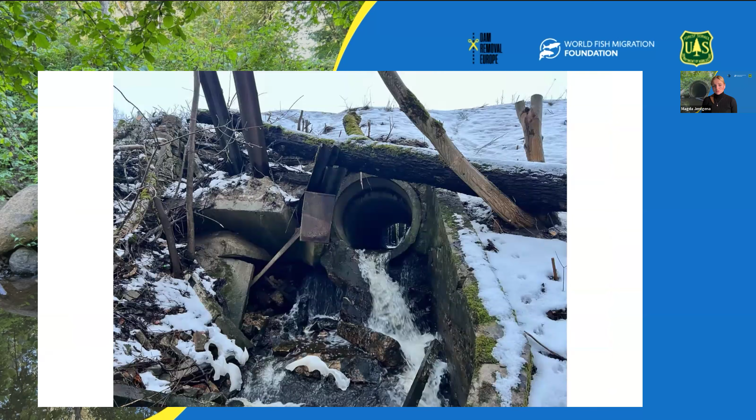This one we're seeing right now is the one we replaced back in 2022. As you can see, it's obviously not passable. This is a different one, but it generally shows the scene in Latvia. The one we replaced was actually more of a communications tool, but it freed up 4 kilometers of this small stream, and we replaced it with this plastic culvert.

The reason this was an interesting project was that we started a partnership with a company that produces these culverts. We reached out to the company we were going to buy them from, Viacon, and this was actually an idea that came from our contractor. He said, when we were working on this project, why don't we try to develop a partnership with the company? We reached out to them and they said they would be more than happy to donate the culvert to us free of charge.

Then we went a step further. What we did was try to integrate circular economy principles into this project. They actually gave us 2 leftover pieces from some of their other projects, and we could combine the 2 pieces together to create this culvert, which was no longer a barrier on the river, on the stream. I think this was a really interesting way to approach the issue, and of course it lowered the budget quite significantly for us.

So this was our first trial with culvert replacements, because it's not yet that common in Latvia. We were looking for a low-hanging fruit, and in our case, we see culverts exactly like this. It's much easier to remove and reconstruct them compared to other types of dams or barriers.